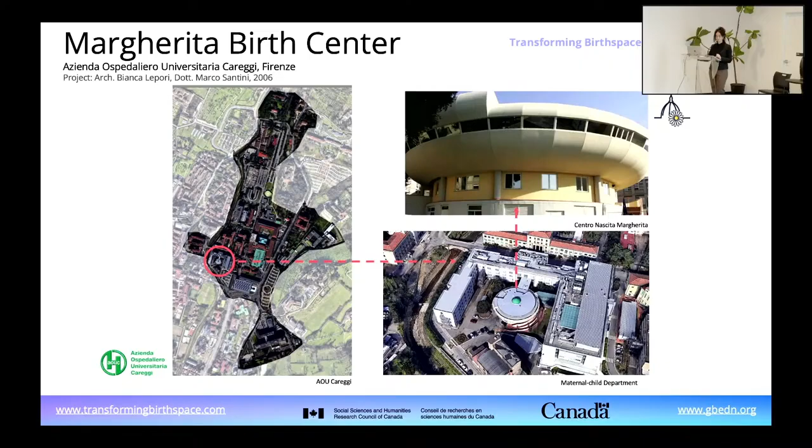The birth center building is independent, recognizable by its circular shape, and connected by 2 corridors to the maternity building, where there is a traditional labor and delivery room, rooms for cesarean section, maternity wards, and other gynecology departments. These corridors and this position allow any emergencies to be dealt with very quickly.

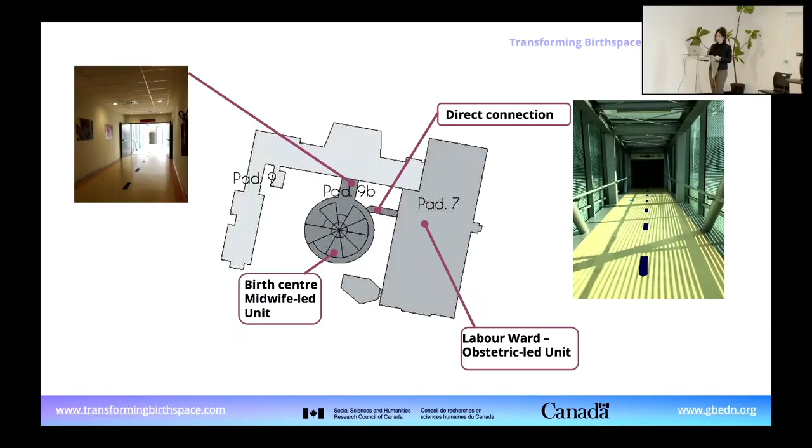This building has always struck me because it highlights the paradigm shift we need today to convey a different concept of birth. And the change is evident in 2 aspects, the spatial layout and the internal atmosphere. The circular shape makes everything more welcoming, even though it is the most difficult shape for architects to design.

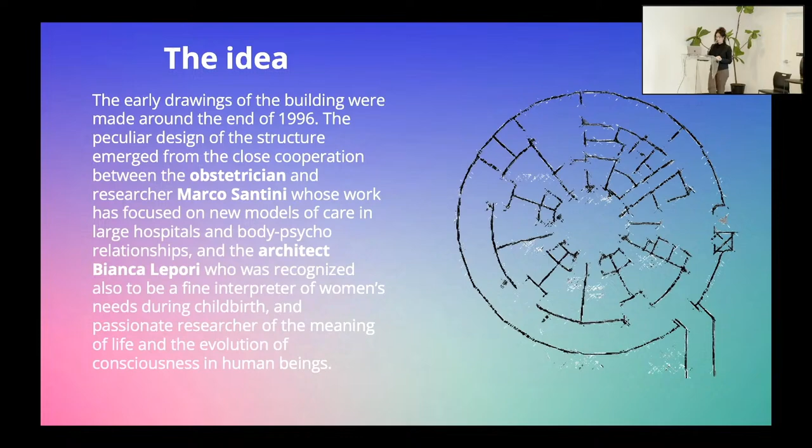Before moving on to the description of the spaces, I will start with the conception of the project. The early drawings of the building were made around the end of 1996. The peculiar design of the building emerged from the close cooperation between the obstetrician and researcher Marco Santini, whose work has focused on new models of care in large hospitals, and the architect Bianca Lepori. The project was then brought to fruition by the company that carried out the works and was completed in 2006.

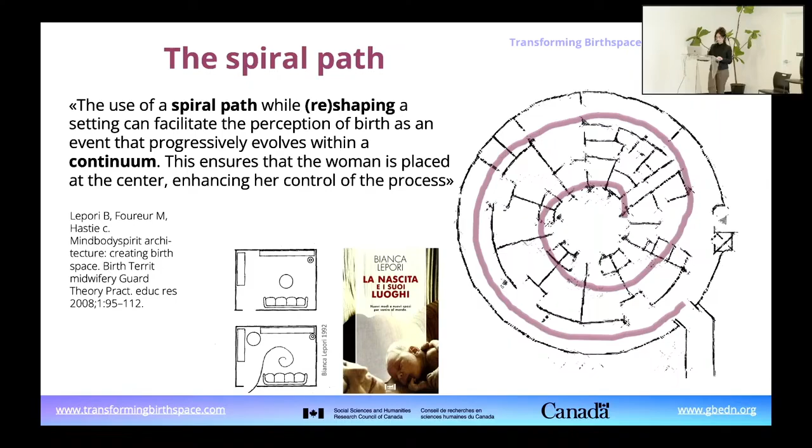The layout concept can easily be traced back to Bianca Lepori's studies on spiral shapes. She said, the use of a spiral path while reshaping a setting can facilitate the perception of birth as an event that progressively evolves within a continuum. This ensures that the woman is placed at the center, enhancing her control of the process, in contrast with the usual arrow-like pathway of traditional hospital labor wards that reflect an assembly line approach to childbirth.

Let us move now to the description of the layout. The building has 3 floors. The ground floor houses the staff changing rooms. On the first floor, there are the consultation rooms and a multi-purpose room for conferences and antenatal classes. And in the center, there is a swimming pool that is also used for antenatal classes. On the second floor, there are the birth rooms.

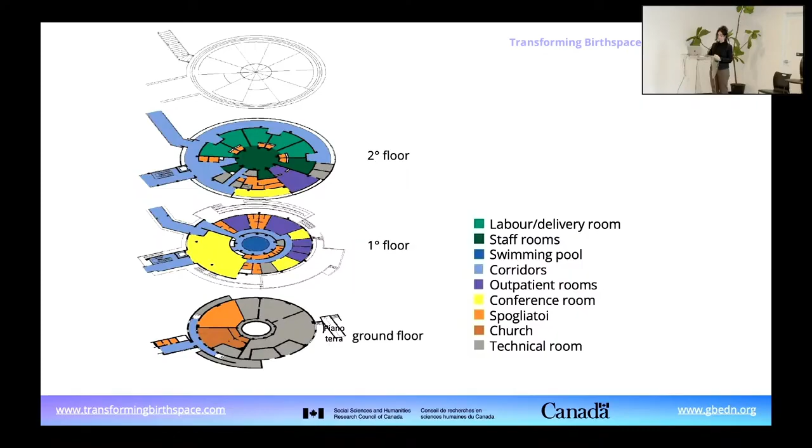Here is the plan of the second floor. The layout abandons linear schemes to focus on a central space around which various functions run, distributed in a circular cloister shape. The center of the circle is occupied by the midwife station. There are 4 rooms, the pink ones. There is also a space dedicated to the kitchen and one to the examination room, as well as a few other spaces for staff.

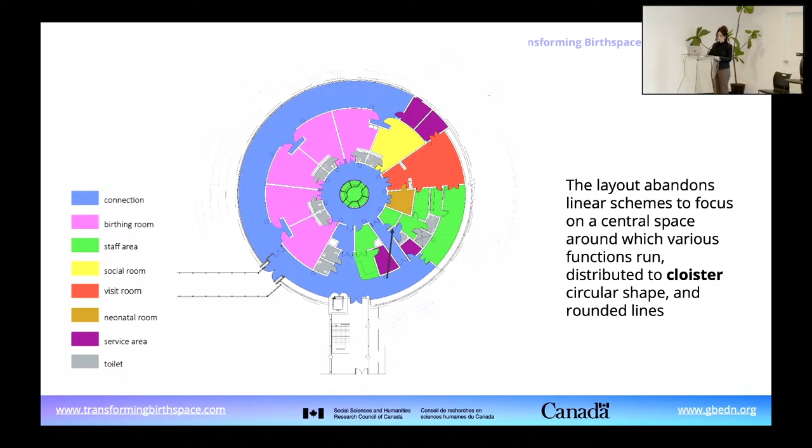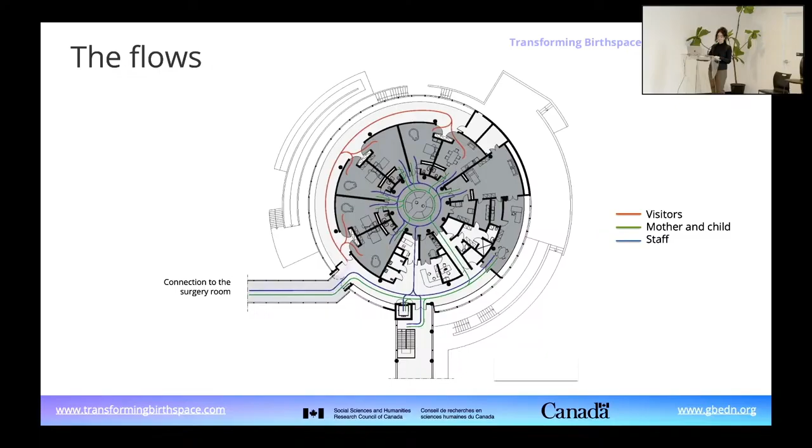The presence of a corridor in the outer ring of the circle allows for the creation of 2 different flows, one more public on the outside and one more intimate on the inside of the circle. The choice of an external corridor is very interesting. It is configured and used as a real extension of the birth room. It is used by women to move around in the early stages of labor and after birth.

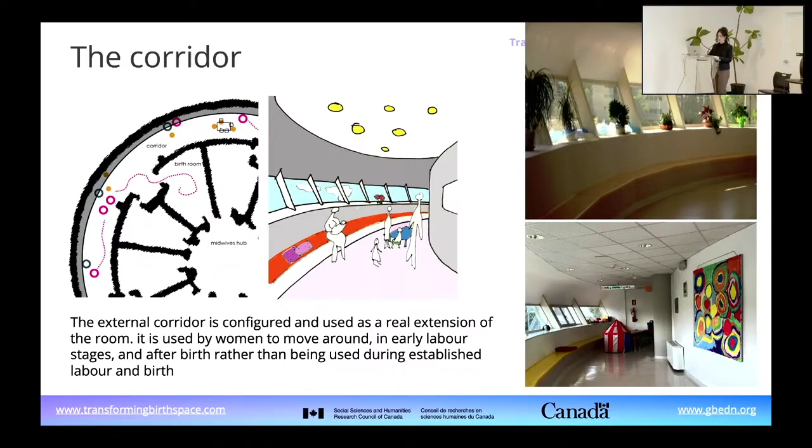But it has also been designed for family members as a more public space. In fact, in some areas, there are games for children to play around. There is a bench, beautiful natural light, and greenery and plants. The configuration of the birth rooms allows a direct connection both with the central space, where the midwives are, and also with the external corridor, making the space flexible for both private and social moments.

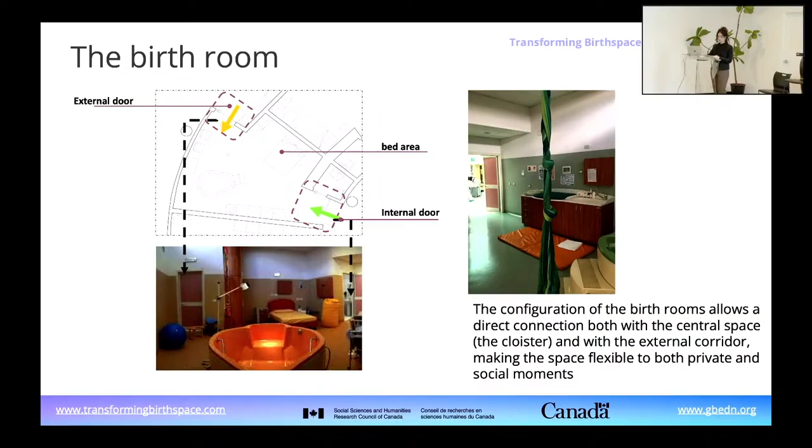The furniture of the birth rooms is home-like. The medical equipment is hidden within this furniture, and this brings the woman to feel safe without invasive monitors and machines around. Also, the bed is not a medical bed. The perception is both of being in a hospital, but at the same time in a welcoming and familiar space.

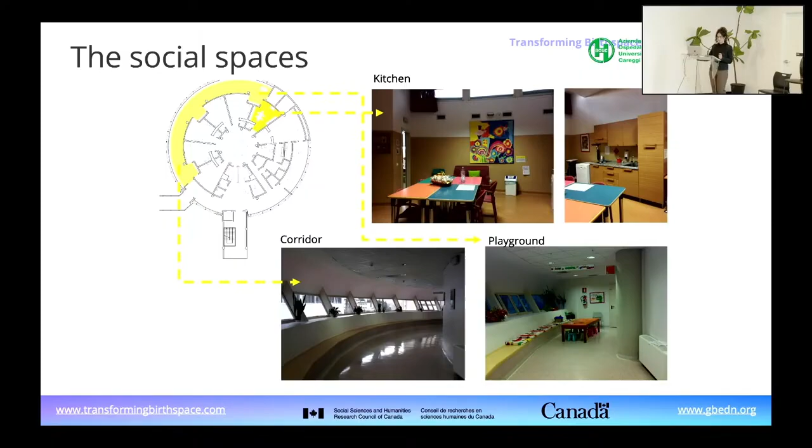Also interesting is the role of social spaces, or shared spaces we talked about the first day, such as the kitchen, made with modular tables, which is in fact a place for meeting and exchanging knowledge between midwives, partners, women, and is a very used space.

In the middle of the birth rooms, there is the compact space similar to a cloister where the midwife's desk is located. It offers a center of reference for women and at the same time for midwives and maternity care assistants. In general, the environment encourages relationships between users and midwife, creating a sense of identification and intimacy within a setting. This quote is from the document, the report of the project by Bianca Lepori.

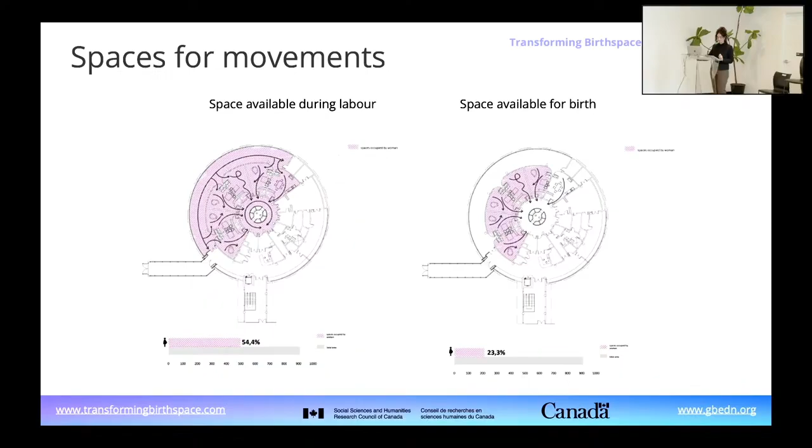So after that, I connected with some international networks, initially participating in the European COST Action BIRTH, a research project led by Professor Soo Downe. And then together with the Midwifery Unit Network in Europe, I worked on drafting the European standards for midwifery units, and finally with the Global Birth Environment Design Network with Deborah Davis and Nicky Leap, which is, say, the only network in the field of architecture.

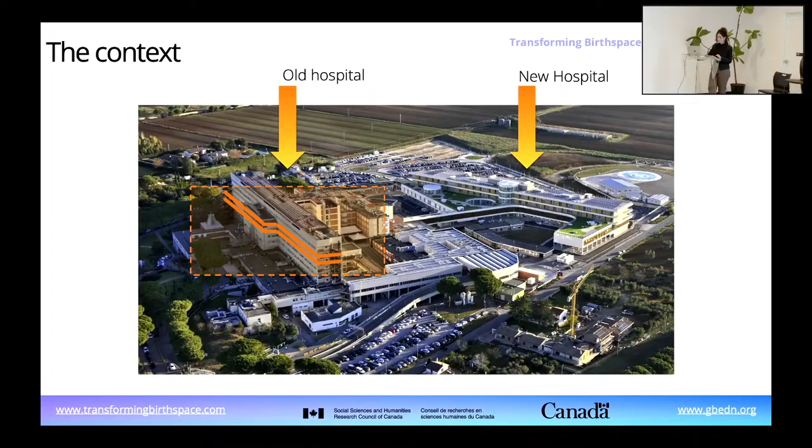The Grosseto Hospital, which you can see in the picture, has recently been expanded with a new hospital, and the old building needed to be renovated to create a maternity and pediatric center on the 4th and 5th floor. The hospital involved our research center at the beginning, in the briefing stage, to support the development of the architectural concept that will form the basis of the public tender.

The objectives of the research were to investigate and define functional unit requirements, user needs and sensory technology significance, to create a design concept for a new layout distribution and a multisensory prototype, and to develop an inclusive co-design process. So we worked closely with healthcare professionals, midwives, gynecologists, pediatricians, architects from the technical office of the hospital, and doctors from the health management. Together with them, we initiated a co-design process that lasted 2 years and led us to gain at the end the project strategies.

We defined functional unit needs and requirements, comparing provision and dimensioning in accordance with regional and national laws. We investigated user needs, focusing on health, perceptual, and psychological aspects of the different users. And we defined the sensory technology significance to be used in the design. In the end, we developed two concept designs. One was a sensory prototype to support labor and birth. That was the topic of Alessia's presentation. And the other was the architectural concept of a layout proposal for the future maternal child center.

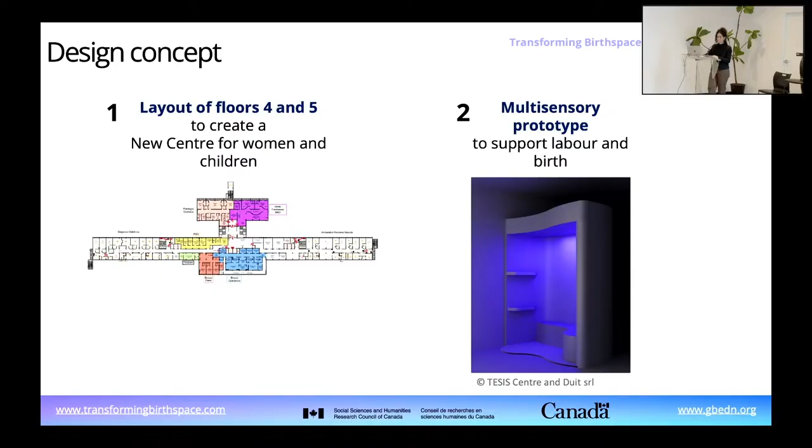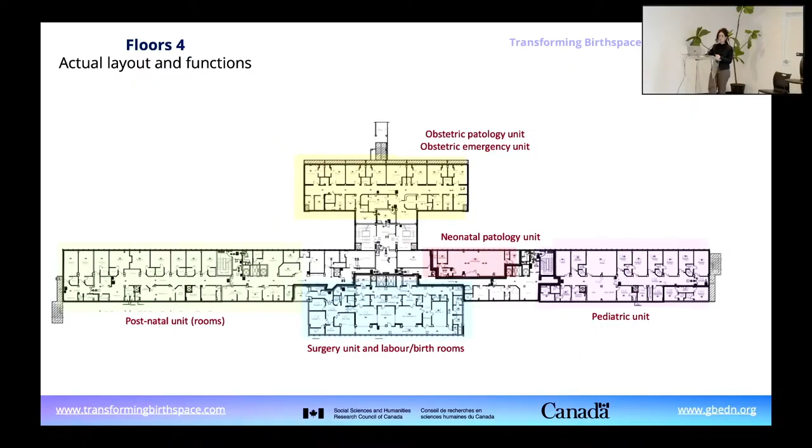So here you can see the actual layout on the fourth floor, where there is a mixture of obstetric and pediatric functions. So the idea that emerged from the co-design process was to create one floor dedicated to women and birth. So the functions were to be reorganized and renovated, including the addition of a space dedicated to the birth centers.

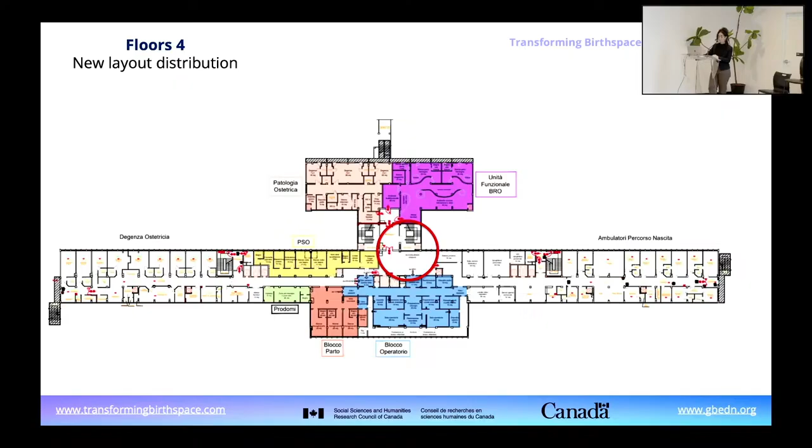So the final solution, after various layout options and discussions, is that there is a central and welcoming hub where all the flows converge and onto which the various areas open, so that women and their supporters and the family can see that there are different places where they can give birth and where someone will take care of them. We put antenatal rooms also, so women became familiar with the place also before birth. And we created an area for a birth center.

It was not easy because, as you can see from the plan, we were working with an existing structure, one corridor, only a few square meters, and we offered to compromise in order to meet everyone's needs and offer all women the choice of where to give birth.

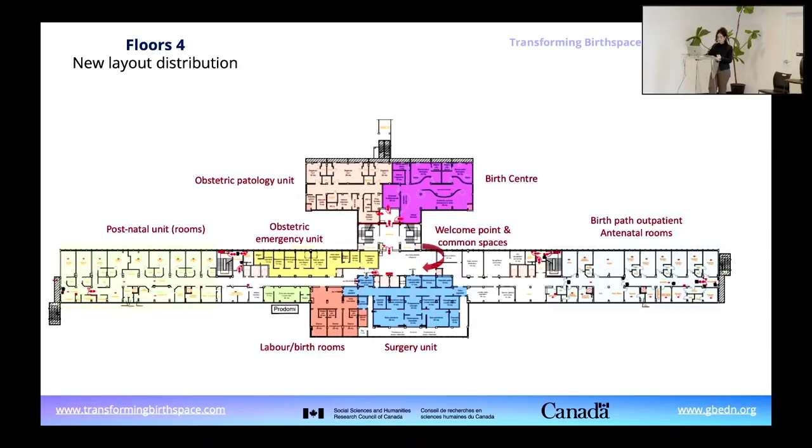Another important result of this research was the creation of spatial and sensory requirements to be included in the architectural concept documents. These requirements describe how to make the space more human and more suited to people's needs. These are 2 pages from the technical report showing the needs in one column, on one page, and in the other the requirements. The requirements are presented with the description of the requirement and the motivation, the reason why this requirement is important.

And so, for example, we have the requirement that the layout should be in some way. Why? Because of the continuity of care, or because of the movement of people. So the person who reads this document can also be informed about the importance of the layout factor and the consequences of their creation. Bear in mind that these documents form the basis of the tender, and will therefore be read by all designers who will be proposing a construction solution.

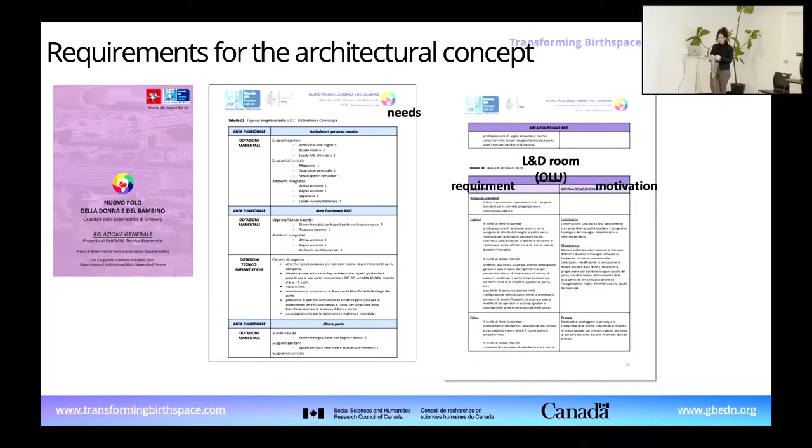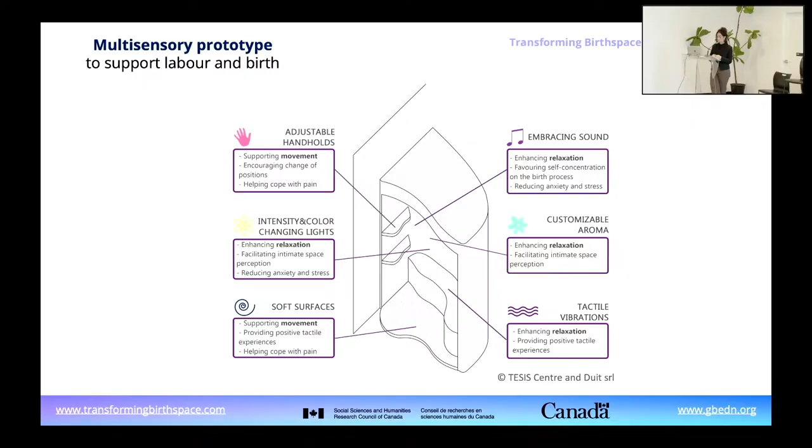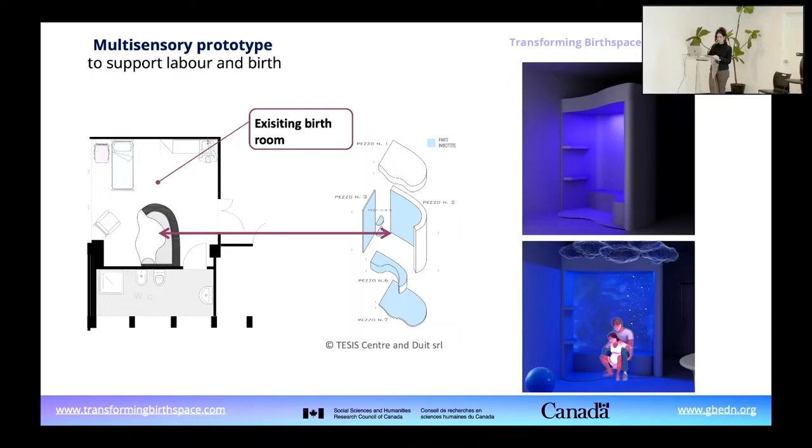The sensory prototype aims to support labor and birth by stimulating the senses and movement. And it is designed to be installed in rooms that cannot be transformed. You can find it illustrated in more detail at the exhibition.

So the second research project concerns the MIRE project. Here we have the Health Trust of Reggio Emilia Hospital, and also psychologists from the University of Genova and staff from Margherita Birth Centre participated in this research. There were two objectives here. One, to study the relationship between environmental factors and the perception of women and midwives in two different settings in order to consolidate certain findings. On the other hand, to give a distinctive character, a new identity, to the birth center that the hospital is going to realize in the maternity center.

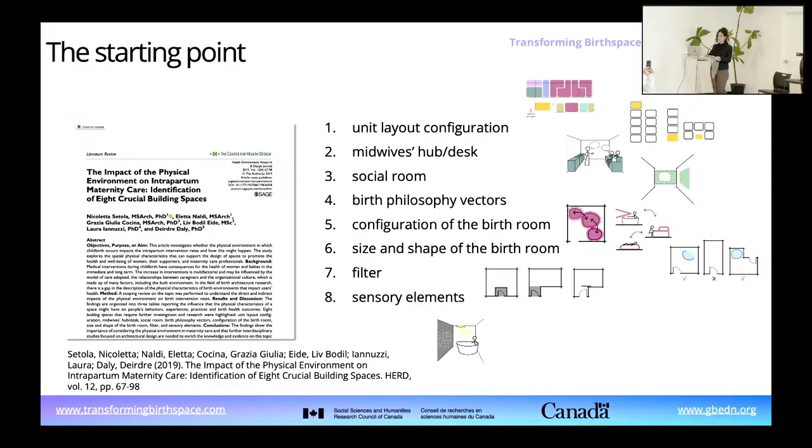So the starting point for this research was to verify the study we carried out on the 8 building spaces that are crucial in the design of the birth environment, which are built on previous studies I mentioned before. We then used them as a guide both to consolidate the evidence and also to guide the design.

To meet the first objective, we used spatial analysis methods, such as space syntax, to read the properties of the layout, together with perceptual surveys on mothers and midwives, comparing two different settings. You can see the plans. One is Margherita Birth Center, and the other one is a traditional obstetric-led unit.

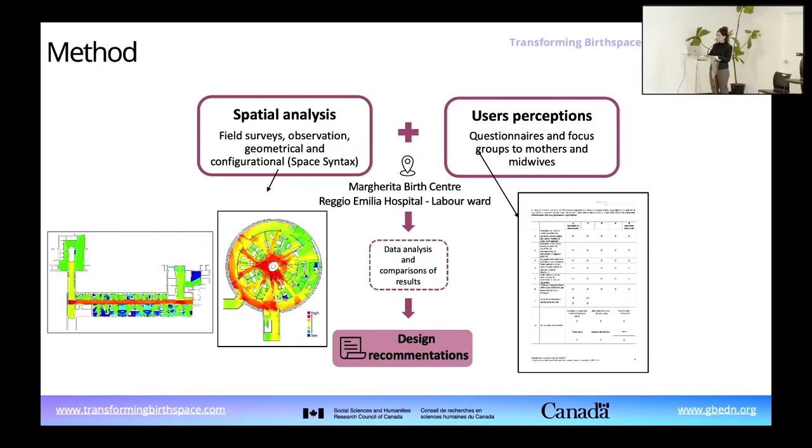We then created an ad hoc questionnaire to survey users' perception of these 8 elements. And this table shows how we arrived at the design of the new tool, because we wanted to compare a spatial, quantifiable parameter with user perception obtained through specific questions. However, there is no time today to discuss this, so there is a paper here where you can find the results of this survey.

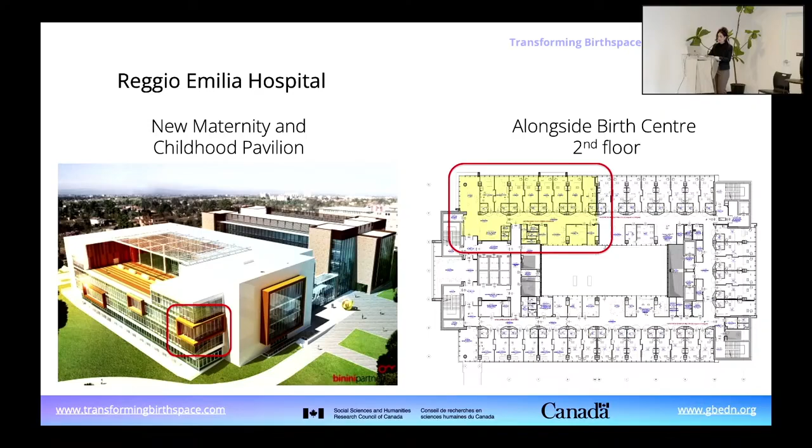Now I would like to talk about the layout of the proposed project and how we came up with it. As you can see in this image, the hospital already had a project done by the architectural firm that won the tender for the entire building, but the hospital was not satisfied about the birth center area, which is on the left, because it's treated like the rest of the rooms, maybe just changing the furniture inside. And so maybe this is the proof that there is a lack of knowledge on optimal birth setting for our colleagues.

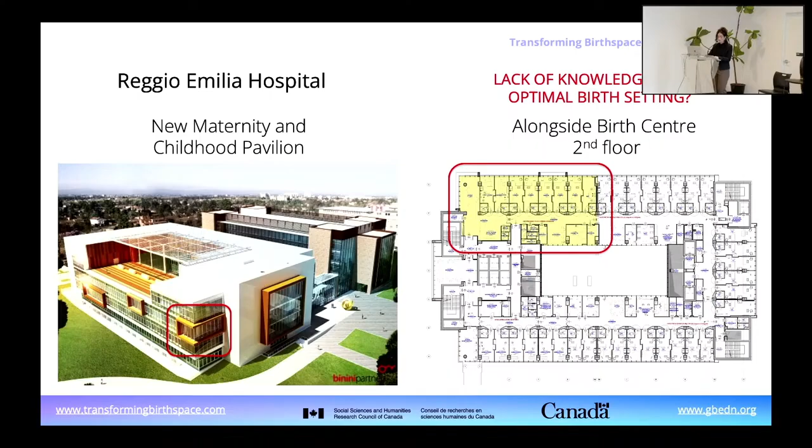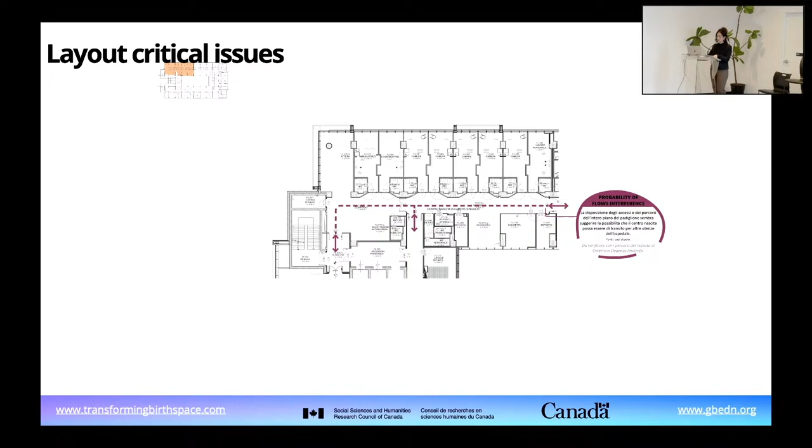And so we started by looking at the critical factors in the designer's proposed plan, based on 8 elements we had studied. In particular, we found the possibility of interference in the flow of people due to the position of the entrances, and the fragmentation of the workspaces for the midwives, that is negative for the model of care, for the communication. And the lack of a buffer zone that communicates a different, calm atmosphere, and the unclear function of social spaces, that are dispersed in the plan and not favoring the communication between different users. And then other things about storage and so on.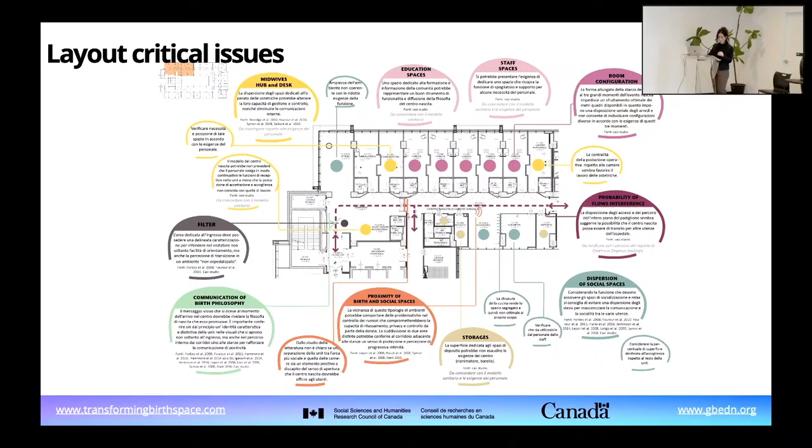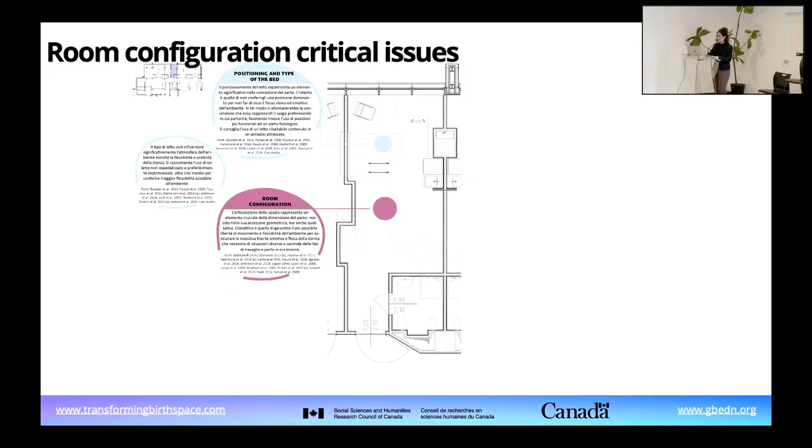And finally, there was the issue of the configuration of the birth room, which is an elongated shape, which offers less space for movement, the bed is in the center of the room, and the furniture are very inappropriate. And also there is a problem about light because the windows are like this one, they cannot open, and so it is a problem.

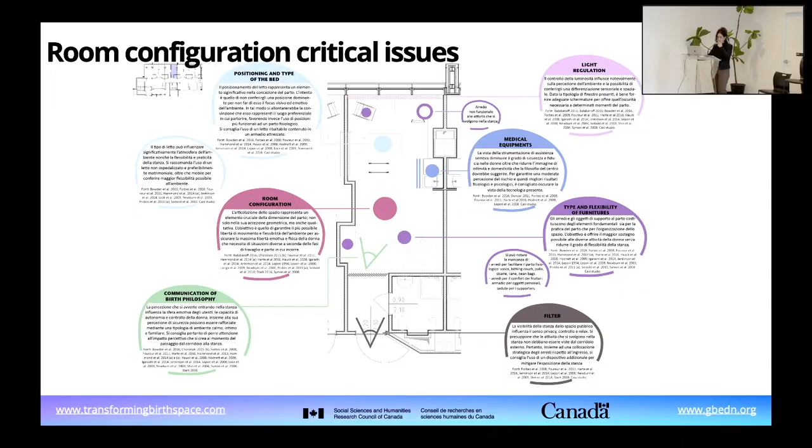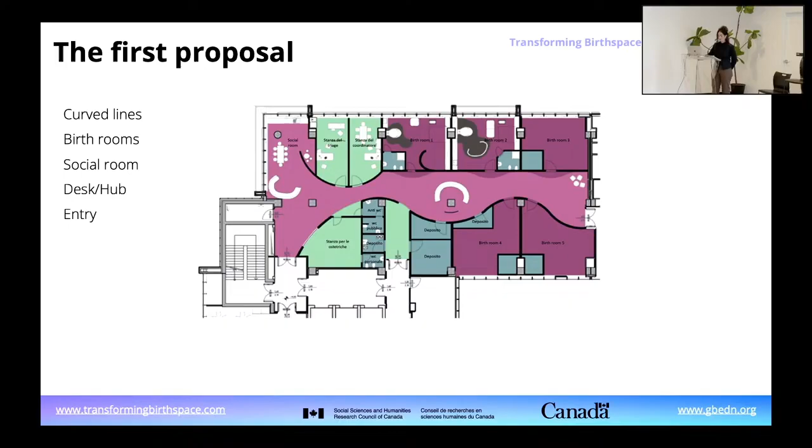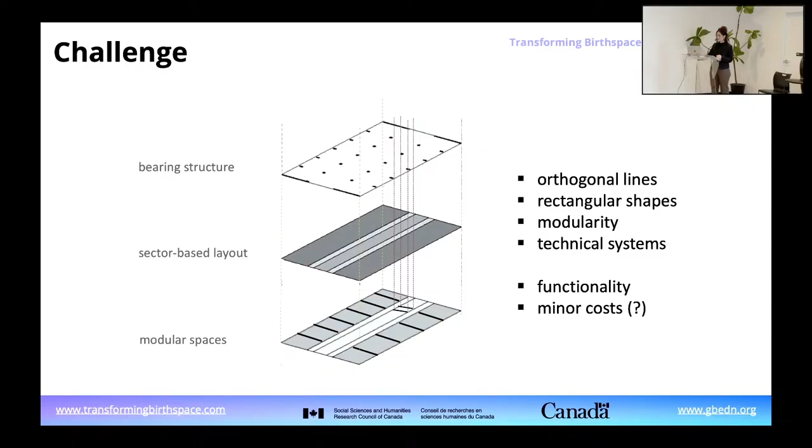So we developed an initial proposal, which we then submitted to the hospital, in which we attempted to break the standardization of delivery rooms by changing their shape and introducing curved lines. At the same time, our study of perception led us to develop guidelines that we followed to improve and optimize the space and the final design solution. And the challenge was to work with a fixed supporting structure and technical system in a defined position. So we exploited the constraints, for example, the position of the pillars, to create new spaces. So this led us to the final proposal. I will briefly describe the key points.

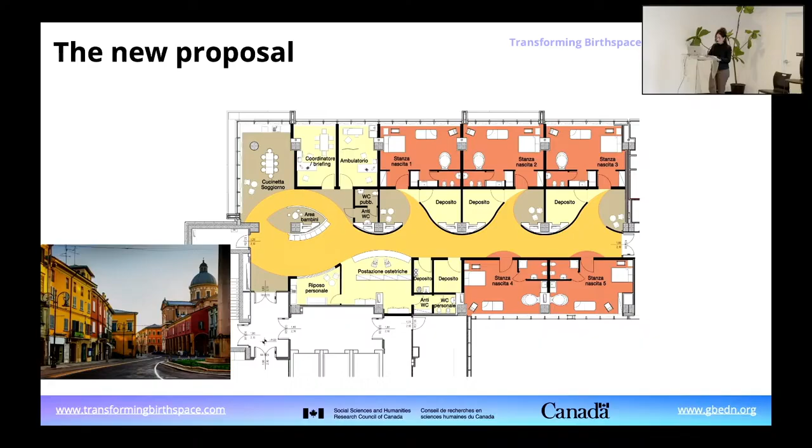Here you can see the colors represent the colors of the floor, and they derive from the color of the city of Reggio Emilia. And mainly we divided the layout in two areas. The first one more social and public, and the second one dedicated to the birth rooms, and so more calm and private. We concentrated the social spaces at the entrance in one space that has a kitchen and a space for relax. And we pay attention to the transmission of the philosophy of birth at the entrance. So the first thing people see when entering the birth center is the social space, the space of the community. And also there is a wall here where there will be strong messages about positive birth.

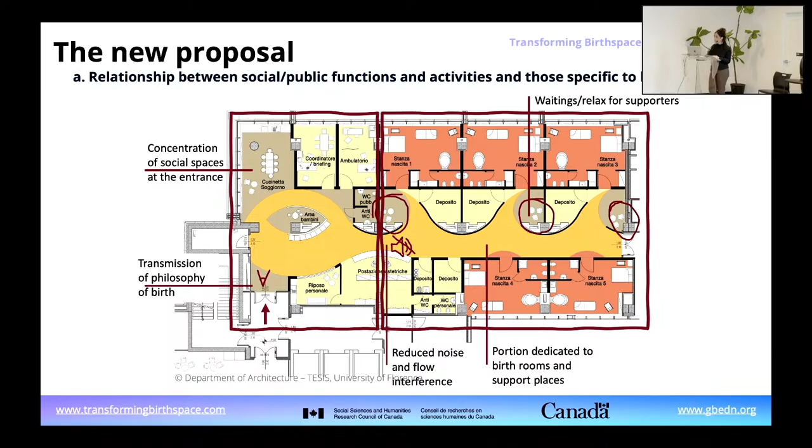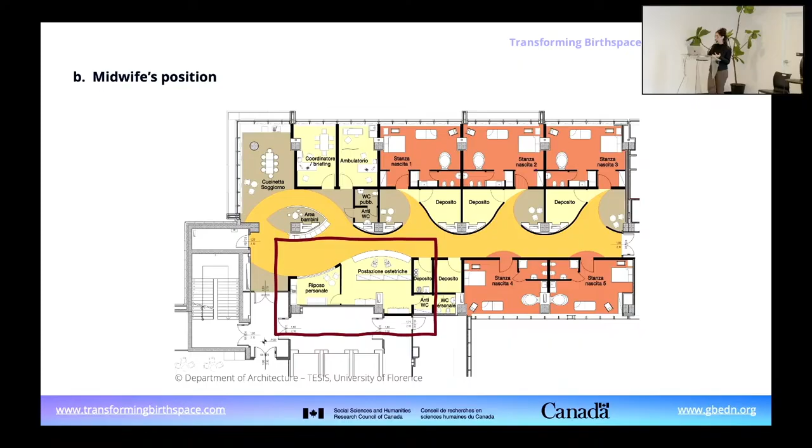The right part is dedicated to the 5 birth rooms and is calmer and without noise. That was a request from women and midwives, and without flow interference because we closed one of the entrances at the previous door. Here you can see also the pillar of the structure that we incorporated inside some spaces, like this is for the supporters or for the family to rest outside the room, and also there are spaces for the storage. The midwife desk is located in the center between the two areas, and this is important because they can participate both in the social and private moments, and also the desk is visible when you enter the space. We added also a support space for the staff. There was not one in the previous proposal.

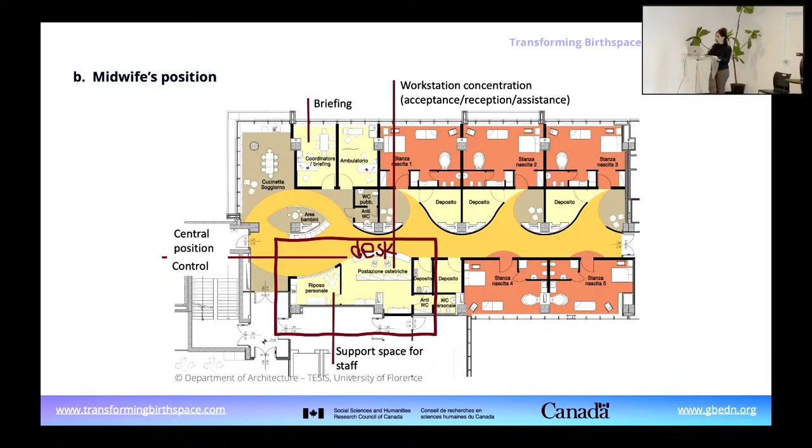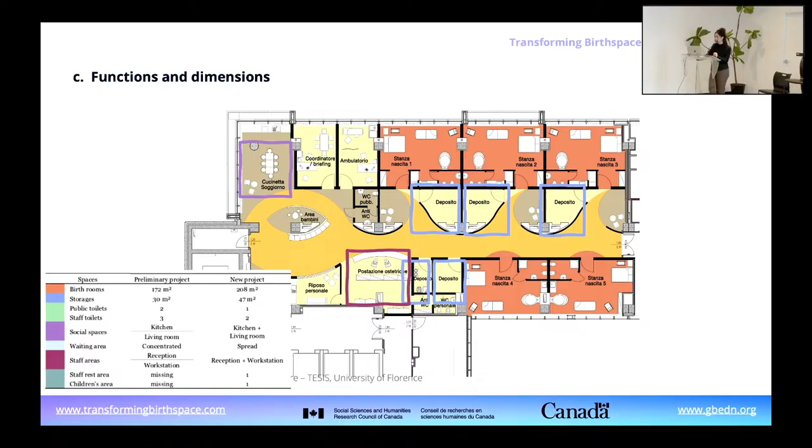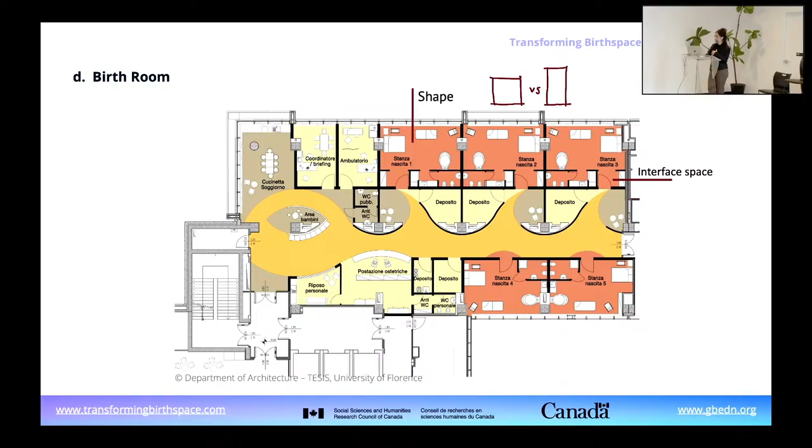And an important thing I think is that with the same square meters we optimized the functions and the dimension of the rooms. So for example, we added a lot of storage that is always needed, and also the square meters of the birth rooms are very different, and we concentrated the social space in one space, so we got place for a new playground for children, a children area, and also the staff rest area. The birth room has a shape that is square and not elongated, and the furniture is very flexible inside, and there is a space at the entrance. The curved line can create a more intimate space before entering the room, and also there is a distance between the door and the room. So more privacy for people.

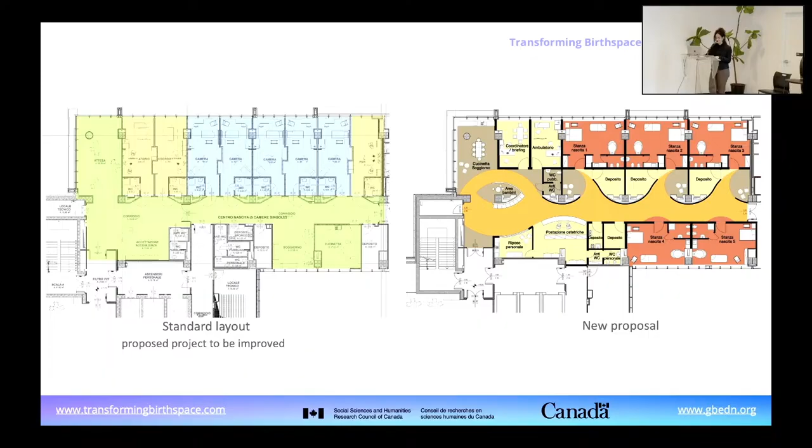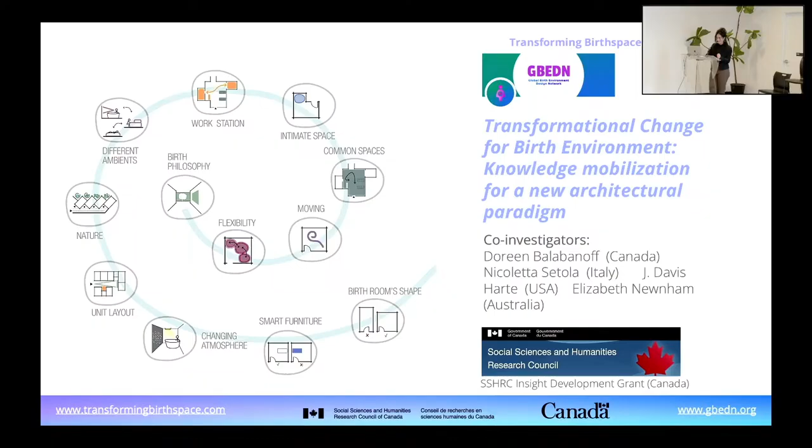So this is the result which shows us how it's possible to do something different if you have the knowledge to do it, with the same cost and the same space. And this also is why I think it's so important to consolidate evidence and transfer knowledge to the architects who design. And I think with the GBEDN network and our project, we are trying to do something in this regard, but it's still not finished. So we have the exhibition, the website, the colloquium, but more to come. And so thank you.